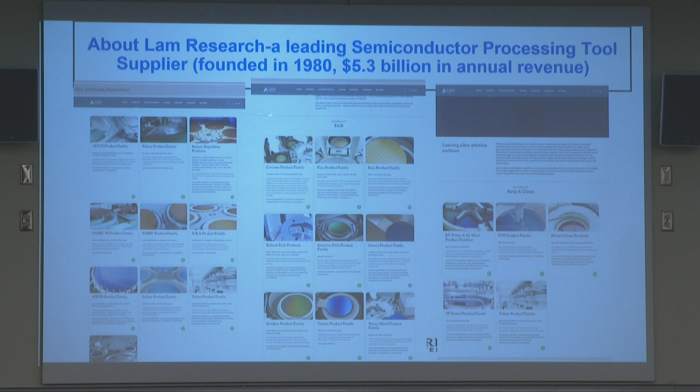So, last page. Okay, this is the highlight page. I cannot read more than enough about her background, but she graduated from UIUC with a PhD in thin film, in material science. Then she joined, actually, the company originally, not Lam Research - what was the company? Novellus Systems, which is another equipment company specializing in thin film. Later on, it was acquired by Lam Research, so that's why she's in Lam Research. And she's now the senior innovation leader in the CTO office for Lam Research.

CTO, I believe it's called the Chief Technology Office, is that right? For developing new advanced innovation in the company. Her research interest lies in the intersection of emerging technology, strategy, and people. And she's leading the university engagement, that's why she's here representing Lam Research.

I also want to highlight a few things - she's very outreach. I joined the same panel as her, working in MIS and also a big driver in terms of many industrial director, board of director roles, advisory roles - just very outreach. So let's hear what she will say today.

Okay, great, thank you. Yeah, I'm looking forward to speaking to all of you because I believe most of you are freshmen - is that okay? Nodding heads, great. So you don't yet maybe know what you want to major in or what you want to do. So this is a perfect time to hear about semiconductors. I'm glad you're in the class.

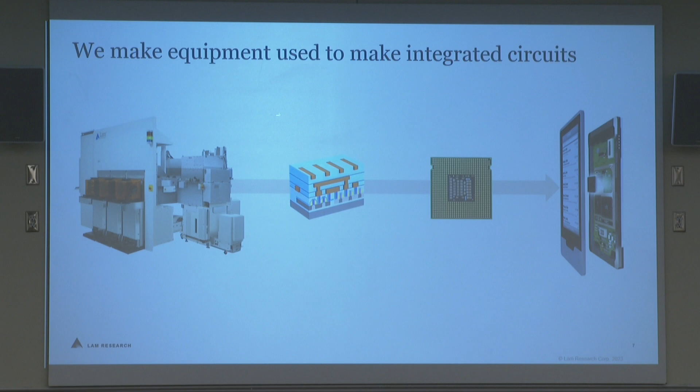Behind all of those chips and electronics, there are going to be Lam products used to make them. Our role in the industry is a semiconductor equipment maker—we make the equipment, and that's an example right there. That's a big piece of equipment, maybe the size of a restaurant walk-in freezer, larger than any one of these tables you're sitting at. It's used to deposit, etch, and clean the various layers used to build up a chip. But not only do we make the equipment, we model and develop the processes that equipment performs, including the materials and etching processes. Just because you can design something doesn't mean you can make it—that's an important caveat. That's why modeling is very important, because you can actually model what the fabrication flow is going to be like to see if you can actually make this in reality once you go into the fab.

We're up to $19 billion in revenue as a company, about 19,000 employees worldwide. We're headquartered in Silicon Valley and have an equally large office in the Portland, Oregon area—those are our two biggest locations in the US. But anywhere there is a customer and a fab, we have an office to support our customers and the tools we have in those fabs. So you can see we have a lot of locations around the world as well.

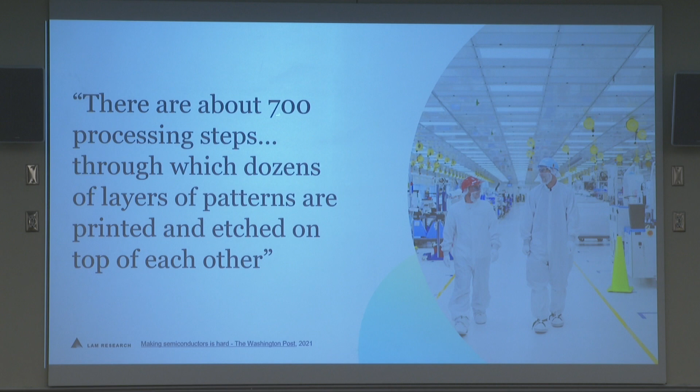So you've already in your class seen an introduction to semiconductor fabrication. You know there's about 700 processing steps to get to the end of a chip—dozens of layers of patterns that are printed, deposited, etched. And Lam is involved in many of those steps.

We're not the only semiconductor equipment company—Applied Materials, Tokyo Electron, ASM, and others operate in similar spaces. In some cases we might be competitors. KLA is another equipment company, but they're around characterization equipment, so they're just peers, we don't compete. But there are really 5 large equipment companies in the world today, and 3 of them are still based in the US.

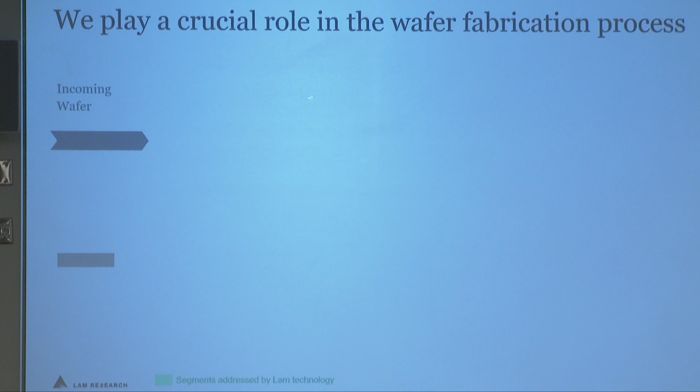So the role that Lam plays in wafer fabrication—this is a really rough schematic. If that gray bar at the bottom is a silicon wafer, most of the industry is 300 millimeters right now, so 12 inches, like the size of a large pizza. You can think of that as the size of the wafers.

We do a lot of deposition of thin films. You deposit a film, and chips are ultimately 3-dimensional structures, so that has to be patterned. It'll go through extreme UV exposure, currently the industry standard, which can print down to around 10 to 13 nanometers.

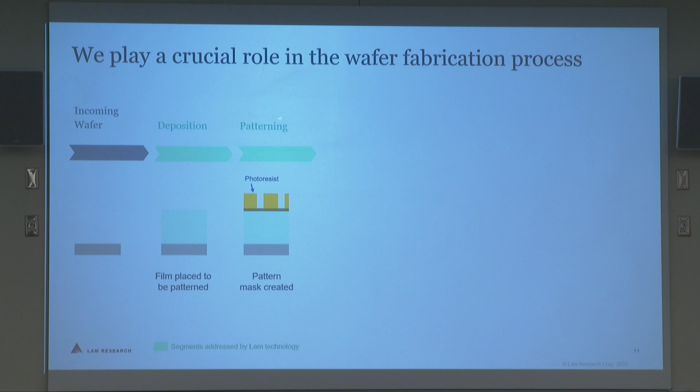You expose a photoresist. It can be positive or negative, so you can either remove the part that gets exposed, or the opposite, remove the part that doesn't get exposed. And now you've got a mask, essentially.

Then you etch where that material's been exposed to remove it, so now you have a 3-dimensional structure. You strip to remove that photoresist and any extra masking layers you used, and then clean it to remove residue from all those processes. So the deposition, resist used in patterning, etch, strip, and clean are all products that Lam designs and sells to our customers in the fab.

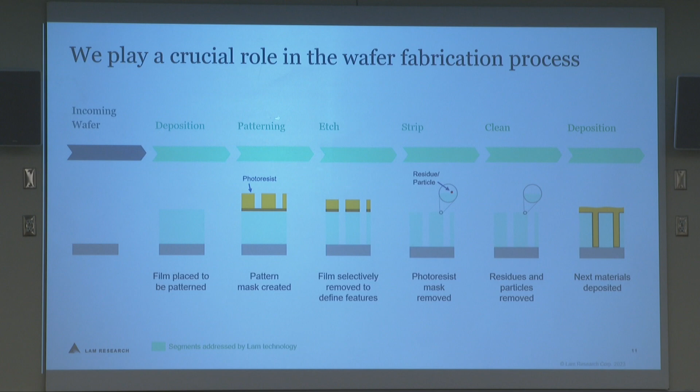And then you repeat that—that gets repeated to make up the 700 steps. The next layer comes down and you go with your next level of materials.

So what do we need? What skills do we need and expertise to be able to do that? We break them down into 4 categories.

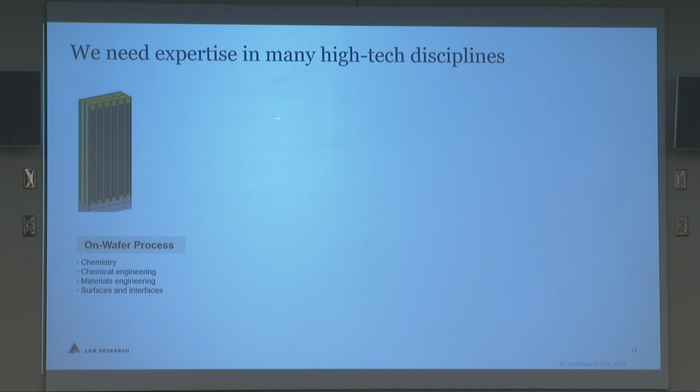There's what we'd call the on-wafer process. That's a lot of chemistry, chemical engineering, materials engineering—understanding the surfaces and the interfaces.

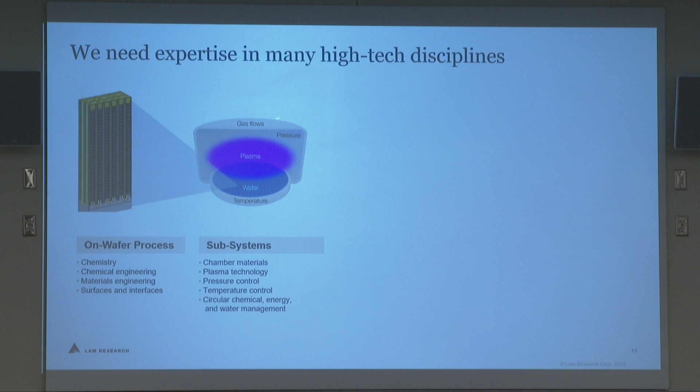And we sell the equipment too. So there's an awful lot of what we call subsystems—mechanical, electrical, radio frequency plasma subsystems that go into it. You have to control pressures and temperatures, and there's all the chemical energy and water management. A lot of the materials we develop use plasma, so there are a lot of really high-tech plasma systems that go into it.

Software and control—we have the software that runs the tools, but also a lot of algorithms and analytics that go into monitoring tool performance in the fab. You can do predictive, preventative maintenance. We do modeling and simulation internally, so we hire a lot of modelers in that space, plus sensors, timing, and all the UX. That's all done internally to the company.

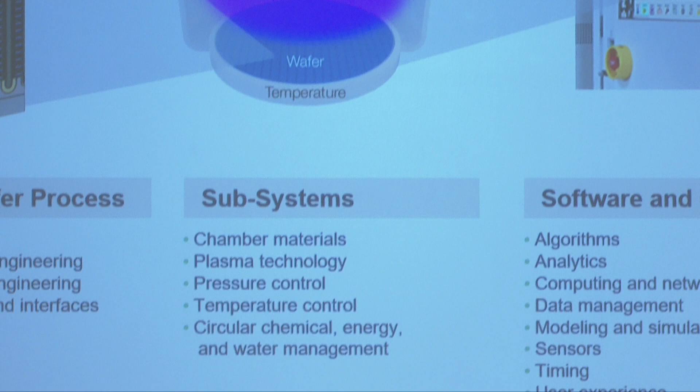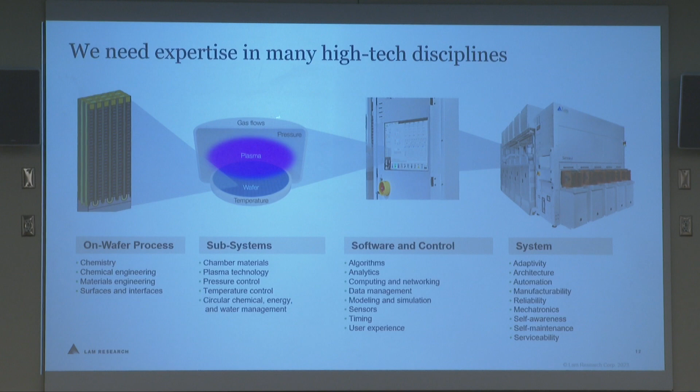And the last is the grander system—that's a picture of one of the tools right there. We need mechatronics, automation, development of the architecture. There's robotics and mechatronics that handle all the wafers and move them around. So we need all of these disciplines as a company to deliver our technology.

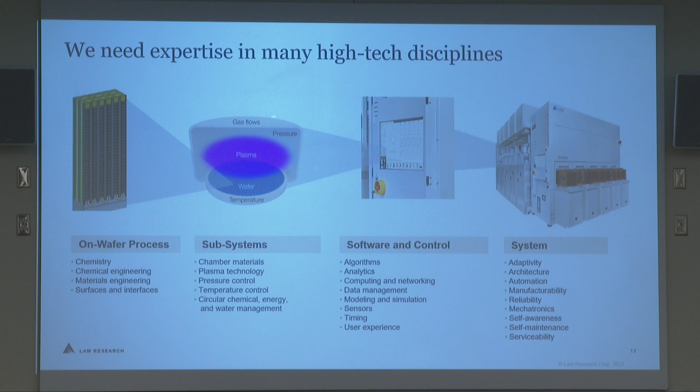So that's what I mean—no matter what major you end up going into, there could potentially be a role for you in the semiconductor industry.

So the next part of my talk, I'm going to look at just a few examples of what we call grand challenges across the company—what do we need to achieve next generation technologies for the chips?

Atomic scale precision—we mean that literally. Affordability, because this is an industry that has to sell products to make money. Sustainability, to make sure we're minimizing impact on the climate. And speed to solution, which gets back to that pace of technology accelerating.

So the first one I'm going to look at is atomic scale precision, and give you an example.

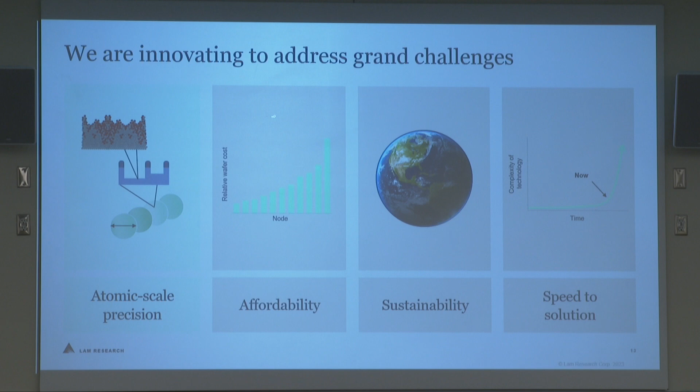So if you think of a continuous film deposition process, here's a basic schematic, and I'm giving you an example for a plasma-enhanced chemical vapor deposition. That gray box is a vacuum chamber, maybe operating from 5 millitorr to 1 torr. Room pressure is 760 torr.

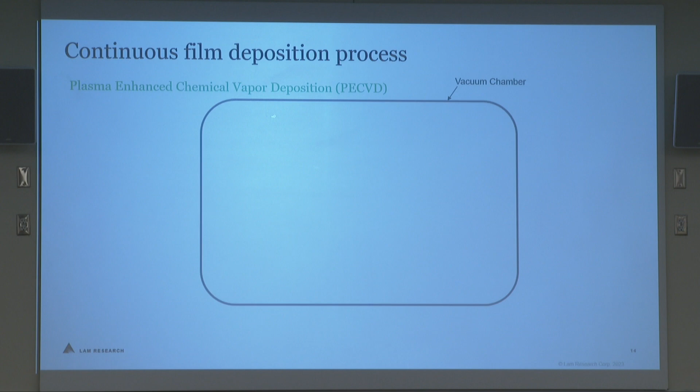So you need a shower head, and a shower head delivers reactants to the wafer. We call it a shower head because it does essentially the same thing as the shower head in your shower, which delivers water, but ours delivers reactant chemicals. It's a round piece with many holes.

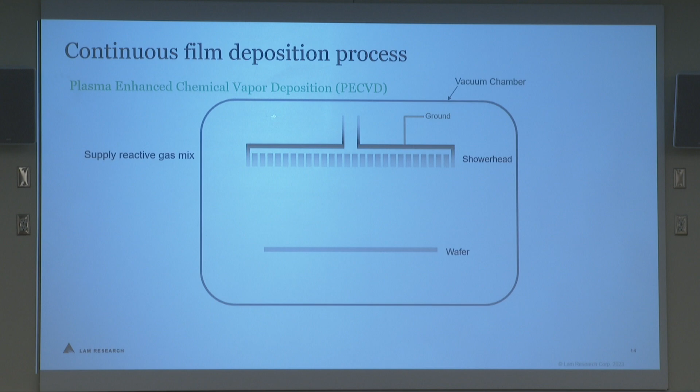You've got a wafer, and you supply a reactive gas mix into the chamber, and you supply energy for the reaction, often either temperature or a plasma in the chamber. That creates the energy the chemical reaction needs to take place. So you get your reaction and build up your film, and that's done continuously, with everything happening at the same time.

As an example, silane plus ammonia gives you a silicon nitride film.

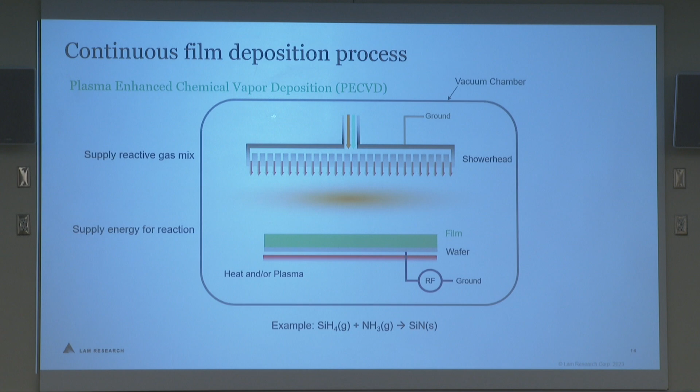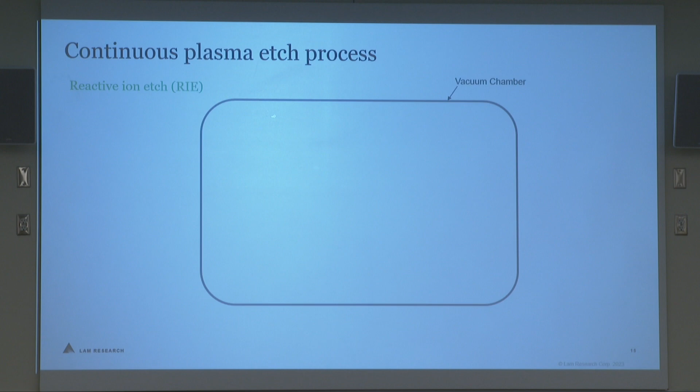So the reverse process is an etch process. Reactive ion etch was kind of the traditional product for Lam initially, and also a standard for the industry. Again, you've got a vacuum chamber, same sort of thing, with a top electrode for the plasma, and the holes from the shower head where the gases come in. You have your wafer, but this time you've already got a film and a pattern on top of it.

So you supply your reactive gas mixtures again. It's a plasma process, so you're generating reactive species. And you've chosen the species so the etch mask doesn't get etched, or gets etched at a very low rate relative to the film, and you can remove the film.

A reverse example then: if you want to remove silicon dioxide, you can add CF4, which creates a silicon fluoride compound that's a gas - it's volatile, so it goes away from the surface - and CO2, which is also a gas, and you remove the film.

But those are continuous processes, so you only have so much control over them. Products that Lam has introduced into the market for atomic scale precision - one of those grand challenges is atomic layer deposition and etch.

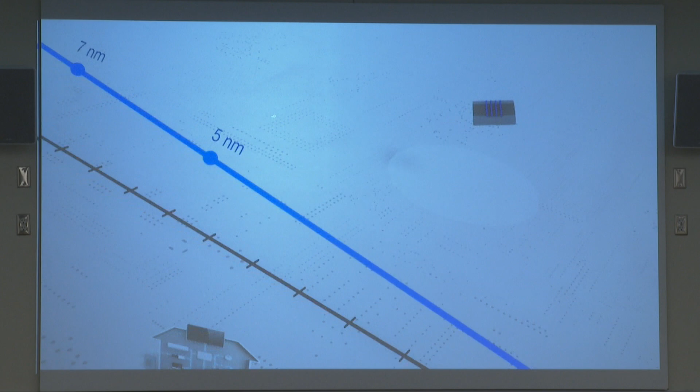Following the trajectory of Moore's Law, the semiconductor industry has transitioned from microelectronics in the 1980s and nanoelectronics in the early 2000s to today, where we have entered an era of atomic scale dimensions. At the atomic scale, with only tens of atoms at stake, there is no margin for error. Every atom matters, which is why developing the most advanced technology presents such an unprecedented challenge for chipmakers.

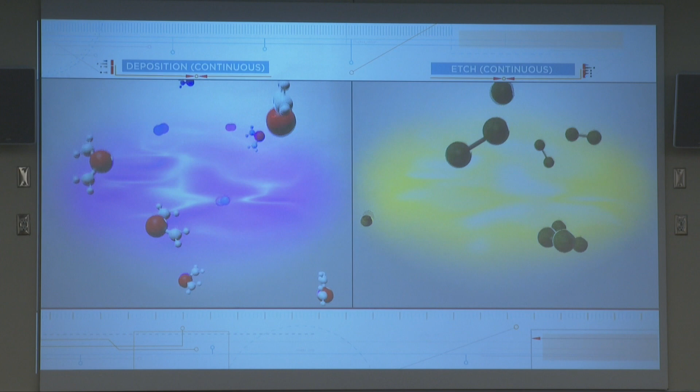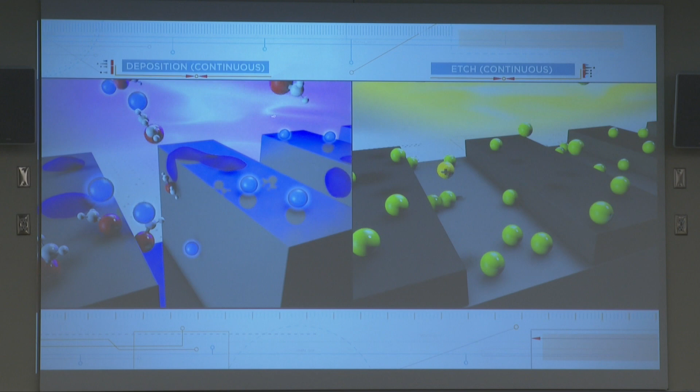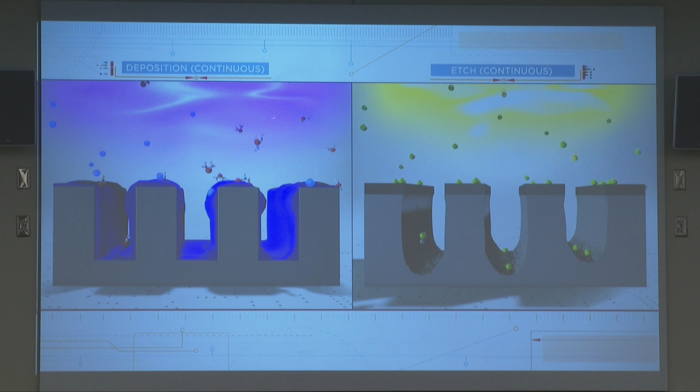Increasingly critical in the making of state-of-the-art semiconductor devices are deposition and etch processes, which involve gases or ions reacting directly with the wafer surface, often using plasma to make reactions faster. For decades, these processes have been performed by delivering all of the reactants to the wafer at the same time for the duration of the process. However, in the atomic era, these processes are increasingly difficult to control, and for the most advanced structures, they simply won't meet the requirements anymore.

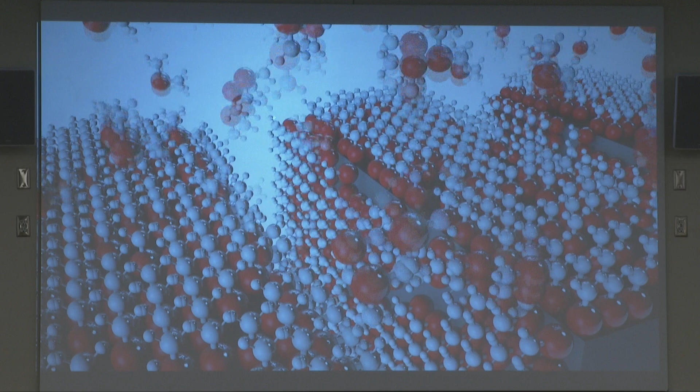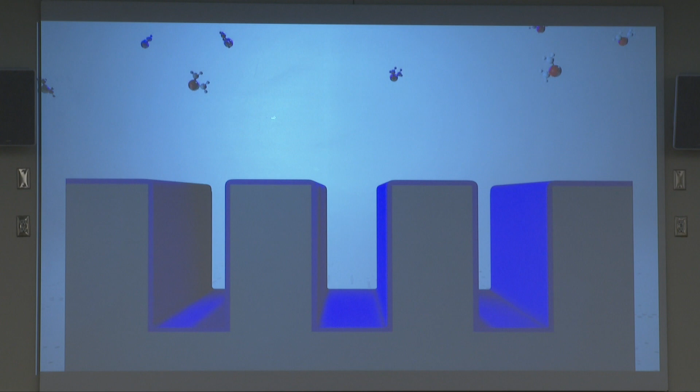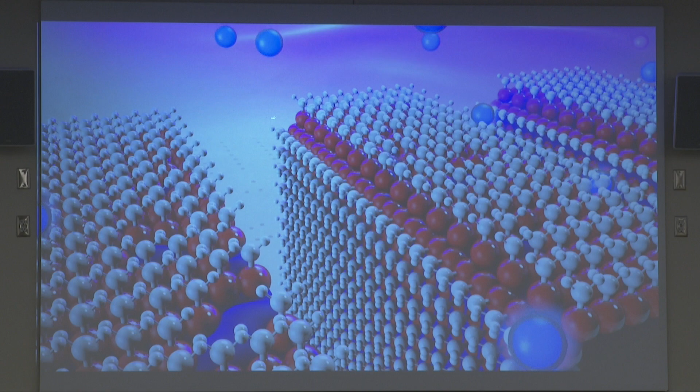The breakthrough that was needed can be found in atomic scale processing, where we can achieve greater control by separating out the reaction steps. In atomic layer deposition, or ALD, two adsorption steps occur in sequence to produce a conformal film, even on high aspect ratio or 3-dimensional geometries. While multi-step processes tend to be slow, we can make them faster by quickly switching between the individual steps and using plasma. After many years in the laboratory, ALD has become productive enough to be a mainstream technology.

However, the etch counterpart, atomic layer etch, or ALE, has been much more challenging to bring from the lab to the fab. It turns out that it is much harder to atomically remove films than it is to deposit them, especially when you need to etch directionally. But at Lam Research, we found a way to make it happen.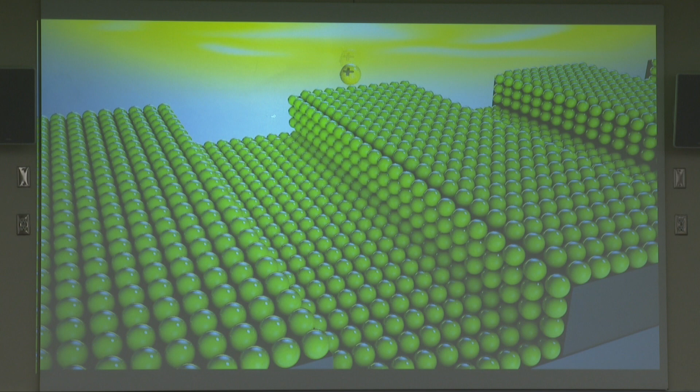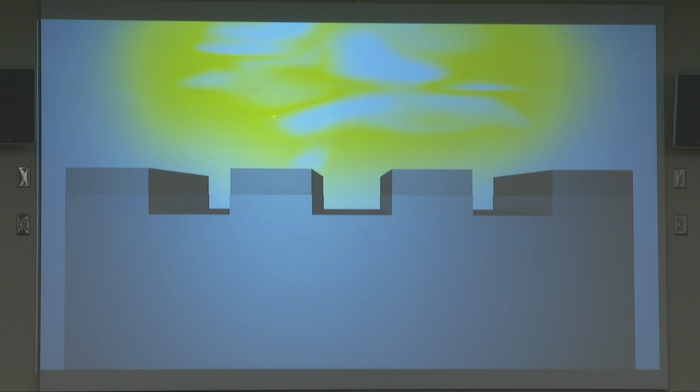The ALE process is based on the same concept as ALD, in that the reaction steps are separated. ALE typically starts with an adsorption step to form a reactive layer, followed by a removal step called desorption to take off this layer. Using ions allows for the directional etching required to form deep, narrow structures.

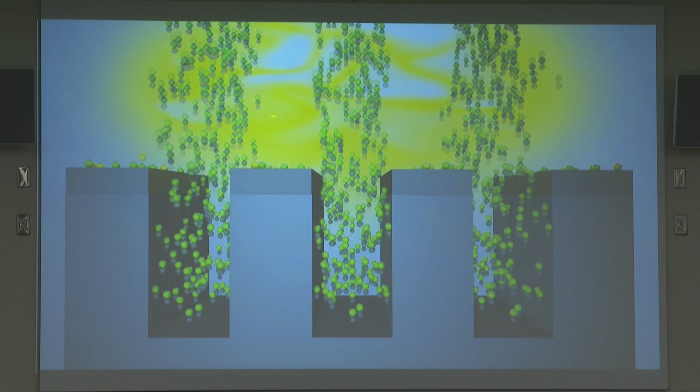One of the biggest challenges for ALE has been throughput, and this is where ALE benefits from having ALD as a predecessor. Fast switching between individual steps and the use of plasma are the keys to this process. Lam's patented first-generation ALE technology joins our existing portfolio of ALD tools today.

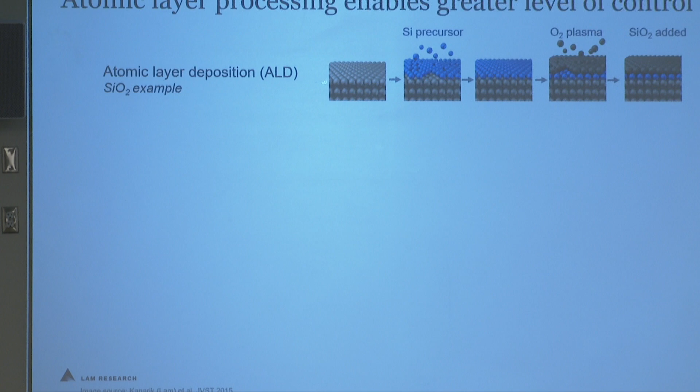The difference between a continuous process and the atomic layer is these steps are individually separated from each other. For the deposition example, you bring in a silicon precursor. It's usually an organometallic, silicon bonded to an amino group or some other labile group with carbon, nitrogen, hydrogen. Then you bring in an oxygen plasma that reacts and strips off that excess, but leaves only the silicon, and the oxygen bonds with that silicon to create your silicon dioxide.

It's similar in reverse for the atomic layer etch process. So if you want to remove silicon, you can bring in, say, a chlorine layer, as a gas or often as a plasma. Then you bombard it, in this case with argon ions. You can think of ions from a plasma as mini cannonballs that physically strike the surface. They will have an energy greater than the binding energy of that atom to the surface, and they eject it. So you remove the reacted silicon bonded to the chloride, but not the silicon bonded to itself, the underlayer of silicon.

So you have to control that energy very precisely. If it's too much, you just start etching continuously, and you've got reactive ion etch again. But if it's not enough, then you don't remove that layer. So the key is that they are separate steps, and they're self-limiting.

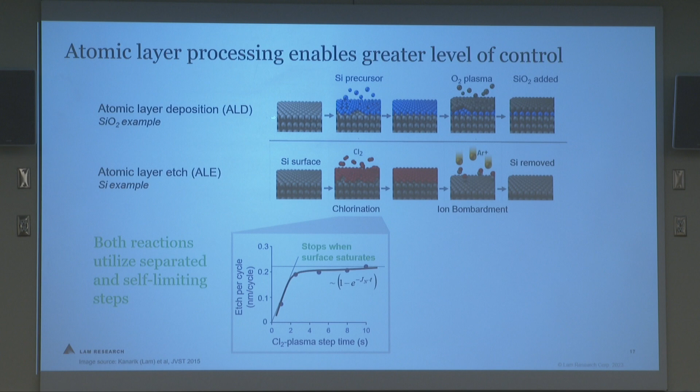This is an example of the chlorine exposure time on the x-axis and the etch rate per cycle, per exposure, on the y. You can keep exposing more chlorine for longer, but you're not going to remove any more film because it will saturate. And the same with the next step.

It's the same etch per cycle now, but we're looking at the argon ion step time. Again, you can keep bombarding it with argon, but we've tuned in that energy level that will only remove what was reacted with chlorine. So when you remove that atomic layer, it just stops and nothing else gets removed. This gives us really precise control and a lot of other advantages.

So what do we gain? It's independent of what we call the aspect ratio. If you're etching a feature, how far down is it compared to how wide it is? Aspect ratios of devices can be, at the low end, say 2:1, or if you're talking about flash memory, which is a 3D NAND device, those are 100:1. You have to get materials down to the bottom of something that's 100 times as deep as it is wide. That's basically the aspect ratio of the biggest skyscrapers in the world.

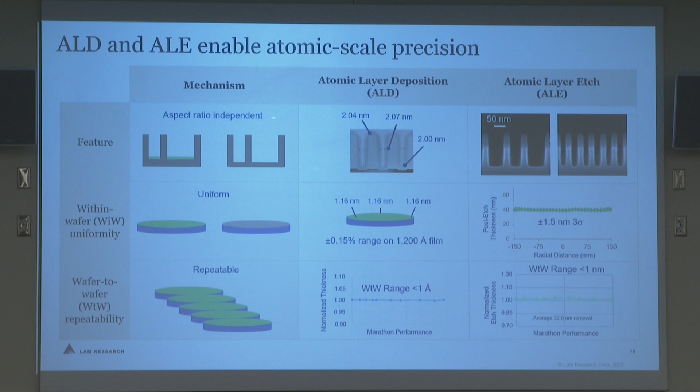It can give us really good uniformity across an entire 12-inch wafer and really good repeatability, the same from wafer to wafer. These are real examples, like for the deposition, looking at that middle graph. If you're looking across an entire film, it's 1,200 angstroms thick, the variation had less than 0.15% variation. And the repeatability from wafer to wafer was less than 1 angstrom variation. That's the kind of precision required for high volume manufacturing that we gain from these new techniques we've developed and brought to market.

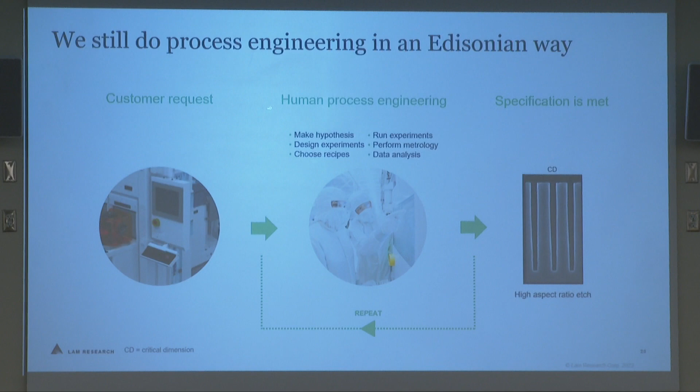The next grand challenge I'll turn to is one addressing affordability and speed to solution. Historically, we do process engineering in an Edisonian way, meaning like Thomas Edison did it. To get to the light bulb, he did somewhere between 1,000 to 3,000 different experiments before he landed on a carbon filament. That's the way we used to do, and still do in many cases, develop process engineering in the lab. You make a hypothesis, design your experiments, run the experiments, look at the metrology, and keep iterating until you meet the specification.

The example I'll use for this grand challenge is doing a high aspect ratio etch. We want the etched structure to look like that. The black bit is what we've removed. The gray bit is silicon that's left.

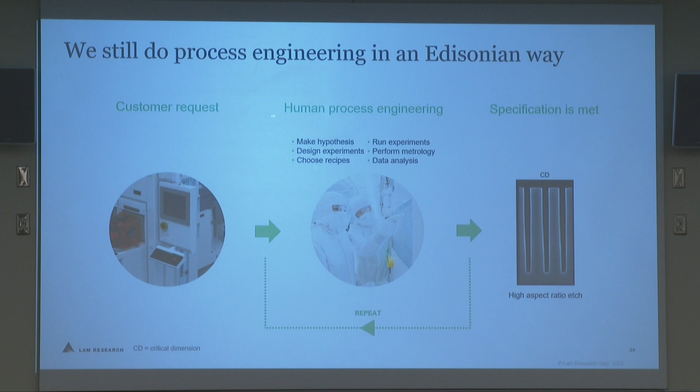So is there a better way to do this? If you look at what process variables, if you walk up to one of our tools and you want to be doing that etch process, how many variables or different knobs do you have to control? There's multiple pressures and powers, reactant gas flows, and it's a cycling process, so there's duty cycles and frequencies and temperatures.

And what do we have to develop? We have to know the etch depth and rate, how much of that etch mask remains, what is the CD, which is the width, critical dimension, kind of at the top of the structure and at the bottom. On the left, you can see things that don't look the way we want. There's too much byproduct at the top and it blocked the etch, or we removed the mask and now we're etching everywhere.

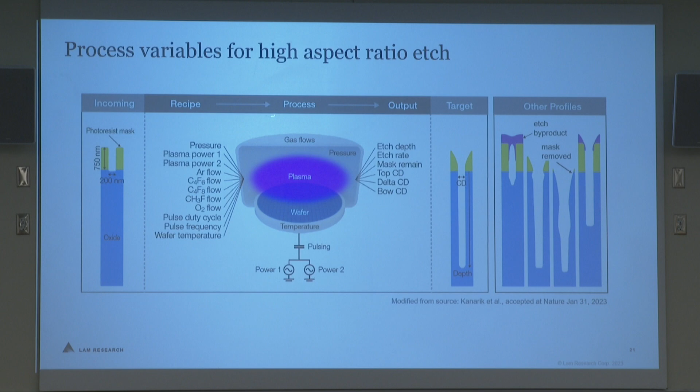So you've got all these variables, and we've kind of coined this internally as Lam's law. The graph I'm showing you is you have many variables, which means there's many possible process recipes you could develop, but very little data available to develop all of those.

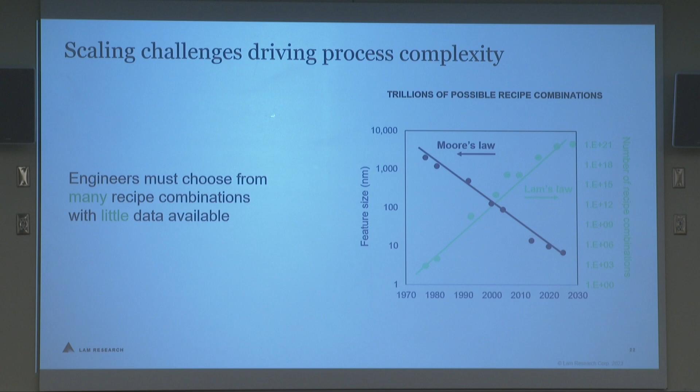So this is looking at, on the left, the gray is Moore's law. You're scaling down the feature size of the chips, roughly by half every 2 years was the original Moore's Law prediction. And on the right is the number of possible recipe combinations you need to deliver that, and it's going up at the same time. So there's trillions of possible recipe combinations. Any human is not going to get there from running a design of experiments with a lot of wafers.

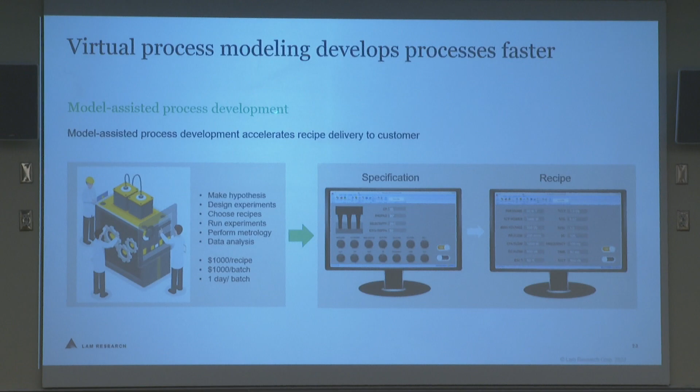So can we do this faster virtually? Can we develop process modeling that then even develops and predicts the processes? So we tried it. We made up an experiment and basically said, for this case, we're going to assign a cost. Let's say it costs you $1,000 for every recipe that you want to try, $1,000 to run a batch of wafers to validate it, and you can only run one batch of wafers a day.

So we built, we have physics-based models of our etch processes, and we map those to what we want to measure in the chamber and the output, the metrology parameters we want to have, and plug that into a machine learning model to try and develop the best process.

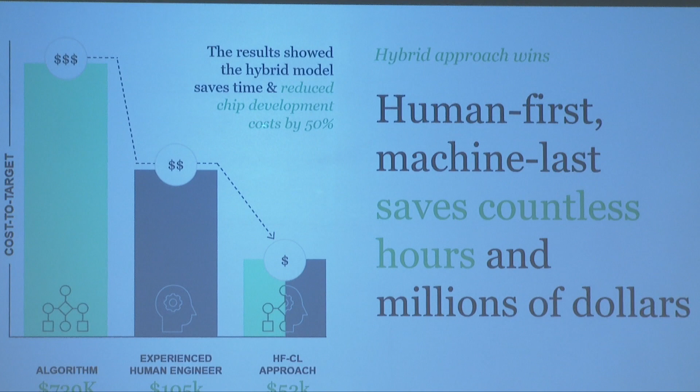And what we found is if you just give it raw into the algorithm, and remember we assigned it cost to running experiments, the algorithm was by far the most costly way to do it. It just did not get to solution. It ran a zillion recipes and batches.

If you give it to an experienced process engineer, they did better than the algorithm did. We also did it where we gave it to people that weren't even engineers. We asked for volunteers throughout the company from like corporate communications and human resources.

And we tested, when did we give it to the algorithm, when did we give it to the process engineer? And we found that there's a really good combination that was the most efficient at getting to a solution: if an experienced process engineer started first, they got it to kind of the right rough space and then fed it into the machine learning model. The machine learning model would get it to the end result we desired faster than the process engineer would at that point. So it's a hybrid approach, human first and machine last.

We can actually get there a lot faster than continuing to use the Edisonian approach from start to finish. We have a Nature paper on this, and the link is in this. You'll get the slides so you can look it up, and I think it was in your pre-reading as well. So that was a really fun experiment we did to try and validate this.

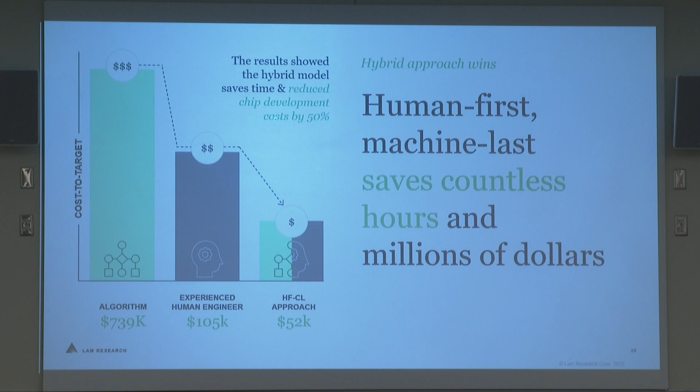Now this is still in the experimental stage. The model can't develop every process recipe we need yet, but that's what we're moving towards. So we need folks in computer engineering and in machine learning and AI and analytics as well in the company. They're the ones that are building these models.

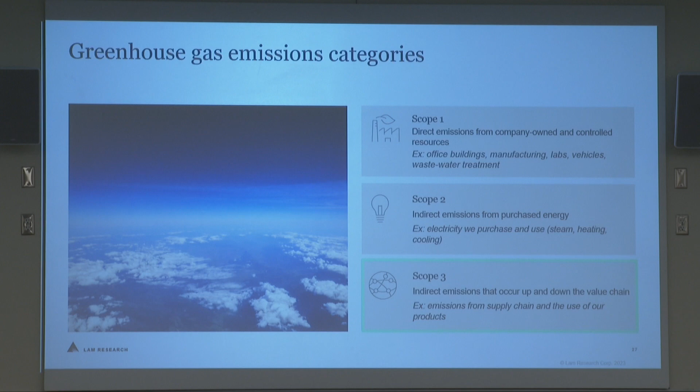And the last grand challenge I want to talk about is sustainability. If you're familiar maybe with how companies assess the emissions, there's different scopes. Scope 1 is what do we own? The labs we operate, our manufacturing facilities, and the energy and the water they use. Scope 2 is what are we purchasing?

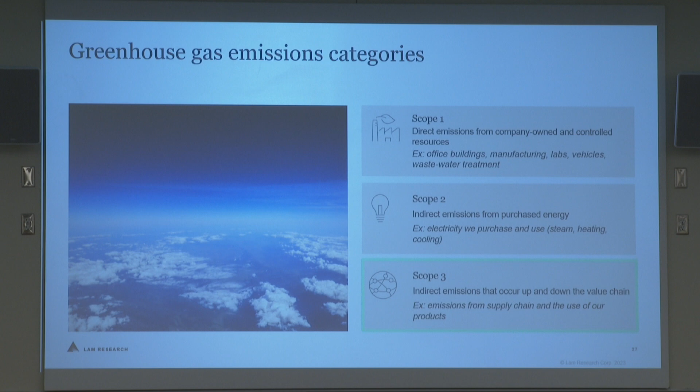So what was the emission? Where do we get our electricity from? Was it a coal-fired plant? Was it wind energy, a renewable source? Scope 3 is when our products are used in the fabs by our customers, that's the emissions they generate. By far, Scope 3 is our largest. It's use of our products in the fabs that generate the most impact in greenhouse gas emissions and in CO2 equivalent production. And one of the biggest impacts is if you look at those reactive chemicals that we use in the industry, they are very high global warming potential gases.

So you saw that, my example of wanting to etch silicon dioxide, use CF4. And there's a lot of other carbon fluoride or carbon chloride compounds used for etching. NF3, nitrogen trifluoride, is commonly used to clean deposition chambers, because anytime you deposit on a wafer, you're also depositing on the entire inside of that reactor, and that material eventually needs to be cleaned off to continue.

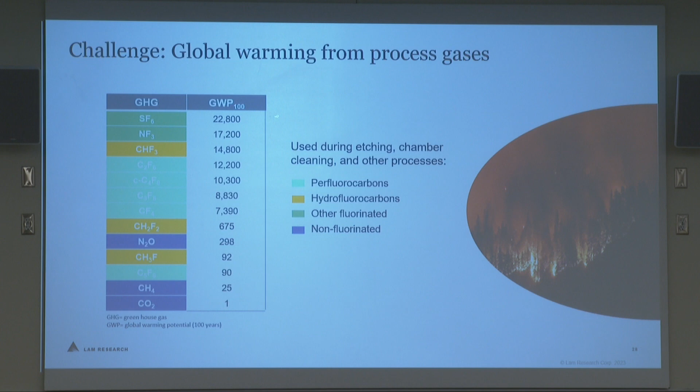Not all of these are released to the atmosphere. Fabs have abatement systems and get treated at the fab sites so they're not released, but that's expensive and costly, and it's not 100% efficient abatement. So this is a big opportunity for developing new chemistries.

So it's a significant improvement in the amount of emissions from this, but this needs to be developed for all of the deposition and etch processes we use in the company. Sustainability is a really big opportunity for improvement in the next few years, and there's going to be a lot of innovations coming out of this.

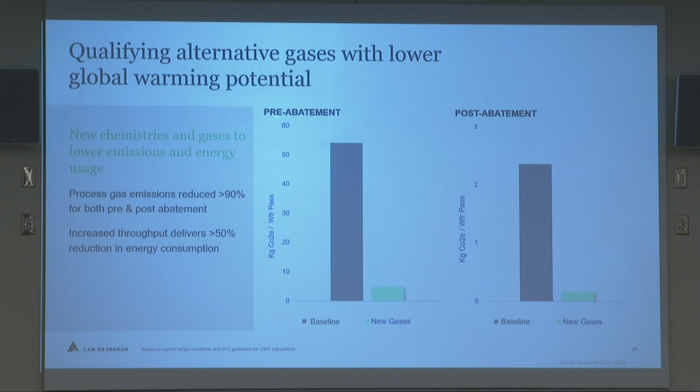But that can't be done by ourselves - the whole industry has to tackle it together. So we work with our customers, the ones operating the fabs, ourselves, our chemical suppliers, and the overall innovation ecosystem. We work with universities on exploring some of these new chemistries and processes.

I wanted to talk a little bit about recruiting and what careers would look like. Process engineers and product engineers are the biggest roles we hire for. If you look at the majors we recruit, there's a lot of them - I'd say probably the top four we hire in the company are chemical engineering, chemistry, material science engineering, and mechanical engineering, but there's a lot of others we need as well.

And we have internship programs for all of this, available at bachelor's, master's, and PhD level at our facilities in California and Oregon. So all of this is on our website if you're interested.